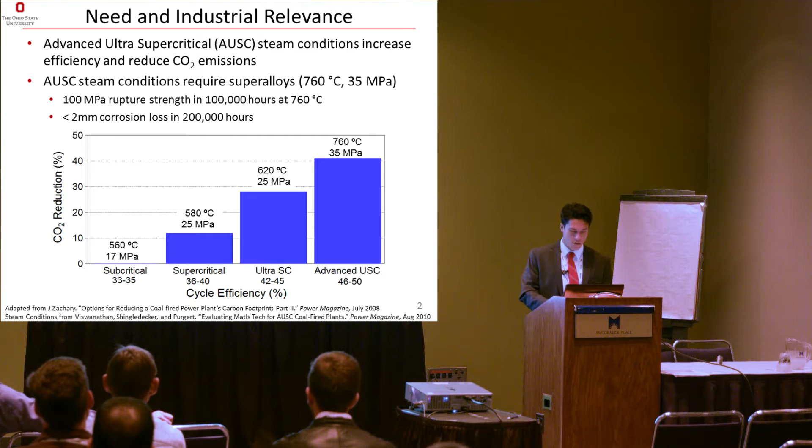Here are some of the requirements. The way we've gotten to AUSC is based on the steam conditions, so this is where steam is a subcritical fluid versus a supercritical fluid. I think you can get to ultra supercritical through plant design. But in order to jump to advanced ultra supercritical, we have some materials considerations, which is why we're studying superalloys for power generation.

Another way to illustrate that is perhaps one of my favorite graphs, which has to do with temperature for rupture in 100,000 hours. We have some common power plant materials here, and as you can see, based on the requirement of 760C and 100 MPa, you're really limited to these precipitation strengthened nickel-based alloys. Another one I'm going to talk about is alloy 617, which has been considered for use at 700C.

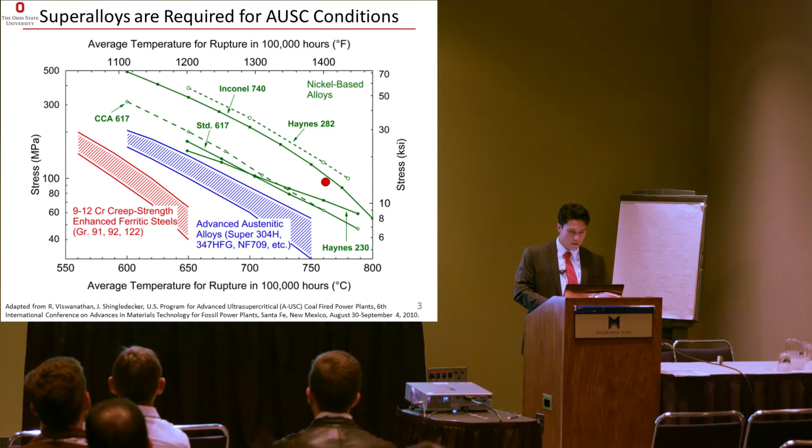So here are the nominal compositions of these alloys. This is 740H. It's been through a composition modification from 740 to H, and some of the changes there were balancing the aluminum and titanium ratio to work on the eta-phase precipitation problem. I think niobium and boron were reduced because there was some liquation cracking. Anyway, some key things to note here are the differences in molybdenum content and niobium and carbon and boron. Those are all going to be relevant to keep in mind.

I should point out, molybdenum is a solid solution strengthening element, which makes it more and more difficult to make forgings such as this. This is a 740H pierced and drawn billet. Here are the dimensions, this is made at Wyman Gordon, and I think a pipe of this size of such an alloy has only been made a couple times. 740H is favored because of this low molybdenum for the forging, and also coal ash corrosion resistance.

It was also designed for this application where alloy 282 wasn't really. It's just been found that it's pretty applicable.

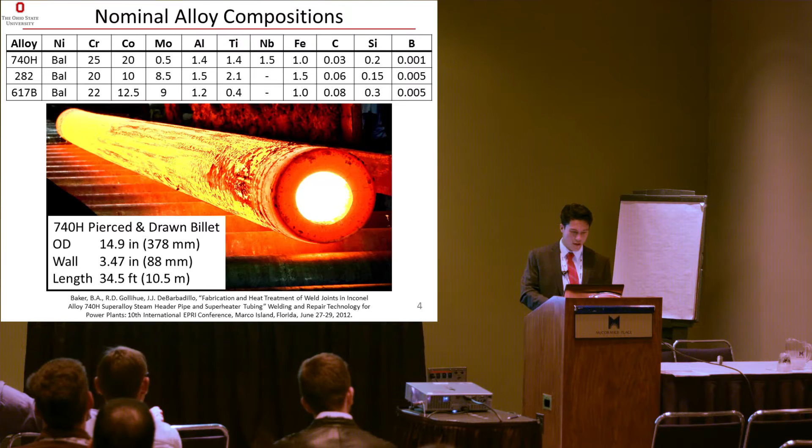So some of the motivation for this work has to do with the creep rupture strength and, of course, the weld metal weld strength reduction factor Dan mentioned. This slide helps really visualize those implications. Such a pipe of a stronger material like 740H could have a much larger ID with a much smaller pipe, and so this obviously moves way more steam. Of course, you would lose this advantage with the weld strength reduction factor, or with an alloy which is not as strong.

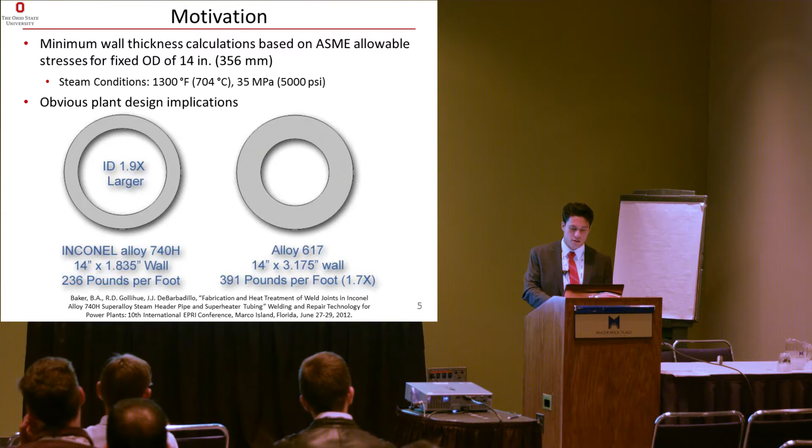The real motivation, though, is because we can account for a debit in weld strength with wall thickness. I mean, that's not an ideal solution, but it's a solution. The real motivation, though, would be premature cracking.

Premature cracking was actually found in a test plant made of 617 and operated at 700C, and there were cracks discovered via steam leaking all over some of these major weldments. That's pretty concerning because this is not as predictable as a weld strength reduction factor, which is a multiplicative factor of like 0.3 or 0.7, 30 percent, something like that.

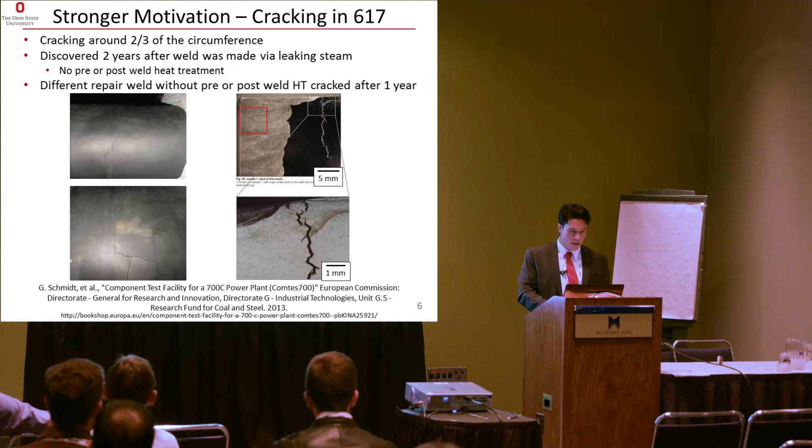So you can plan on that, but you can't plan on this, and that makes it, I think, a little bit more worrisome of a problem. The issue here is supposed to be stress relaxation cracking.

This occurs by concentration of stress at grain boundaries, often associated with intragranular precipitation. There's stress concentration at grain boundaries anyway, but if the grain interiors are strengthened by precipitation, such as in the case of these nickel-based alloys which form gamma prime, there's additional stress concentration at boundaries. When we're talking about stress concentration at boundaries, the other thing you can think about is boundary area in a given volume. So you can imagine if, like in this schematic here, these grains are all way bigger, the stresses on a boundary would be much higher.

Another point to make on the list here is that cracking was avoided in 617 with a post-weld heat treatment for stress relief, around 980 C for 3 hours. This has also been found to improve ductility in a slow strain rate test, which is targeted at this stress relaxation cracking problem. So here we have a little schematic of the problem.

We have, of course, a welding thermal cycle, and then it's followed by a homogenization and stress relief. This is the ideal case, but it's not too practical, certainly not desirable to do this. If this can be skipped at all, that would be ideal. But if you do skip this, and never heat above the aging temperature range, the stresses can't fully relax.

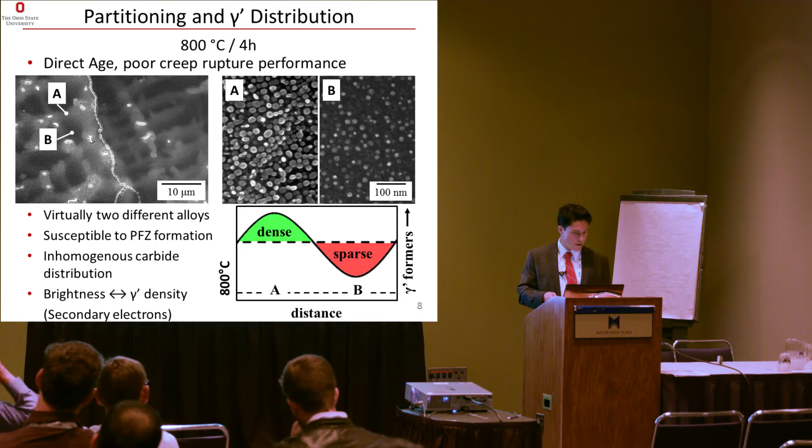So that's the direct age heat treatment, which we attribute most of the poor creep rupture properties to, the precipitate free zones I believe, but there's also this inhomogeneous gamma prime distribution.

If you do a higher temperature aging heat treatment, such as the one that successfully relieves stress in alloy 617, you run into a real problem where you're actually post-weld heat treating between the solvus temperatures for the boundaries and the cores. So when your post-weld heat treatment temperature exceeds the solvus temperature of the dendrite core, which has been reduced due to microsegregation during solidification, no gamma prime forms.

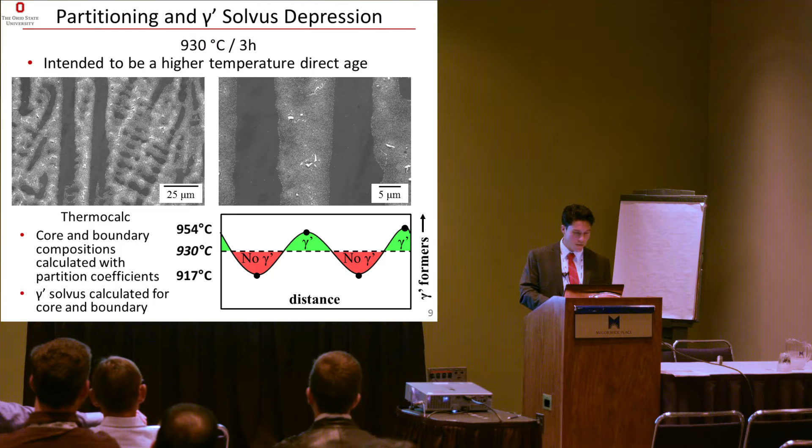And so this is probably like a worst case scenario for a post-weld heat treatment. You need to be below the gamma prime solvus in the core, and every other part of the microstructure, or above the solvus altogether.

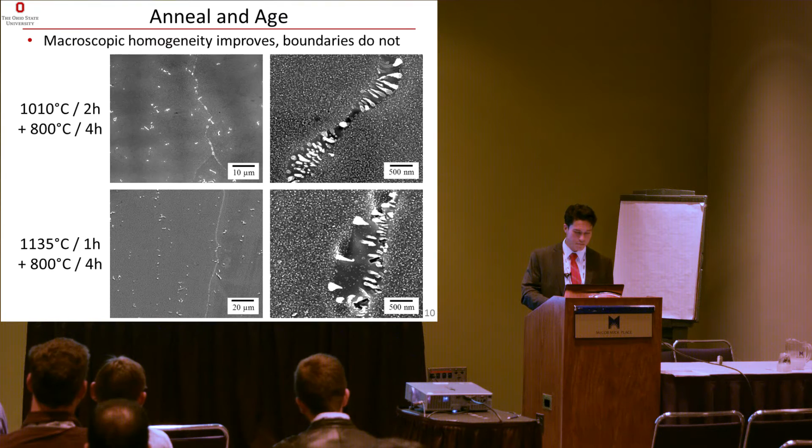So I think the best case scenario is 1100 C for 4 hours, followed by an aging, at which point you may or may not still form precipitate-free zones or discontinuous coarsening.

So at this time, I want to go back to the stress relaxation cracking problem. We've been over the post-weld heat treatments, and the best is probably homogenization at 1100°C for 4 hours, followed by aging.

However, I want to start talking about testing for this. As you look at this thermal cycle, you can think about the stresses that may go with it, and you can start to think about different Gleeble testing approaches.

As with any thermal cycle, you can do this in the Gleeble. You could simulate a heat-affected zone, or maybe not because your samples are taken from a weld, or maybe you simulate the homogenization and aging before applying load, or maybe you apply load when cooling.

A lot of people have thought about this before and haven't gotten to a point they found really satisfactory. I've tried different combinations of heating and loading at different times and rates, and I was never really satisfied.

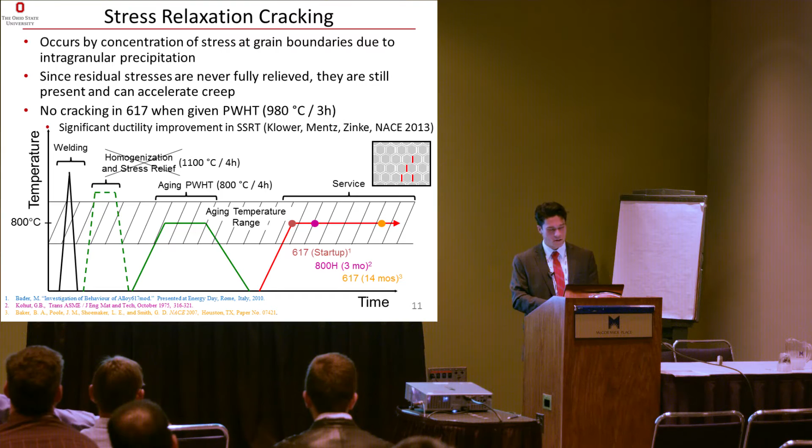What did occur to me is that when you're holding a hammer, every problem looks like a nail. So I decided I wasn't going to use the Gleeble for this - I didn't think it was really the appropriate approach. So I changed modes, into the standard self-restrained versus externally loaded testing debate. I changed approaches to self-restrained testing.

This testing approach begins with compact tension samples, which are pre-strained in compression to create a tensile residual stress, which then relaxes upon further heat treatment or thermal exposure.

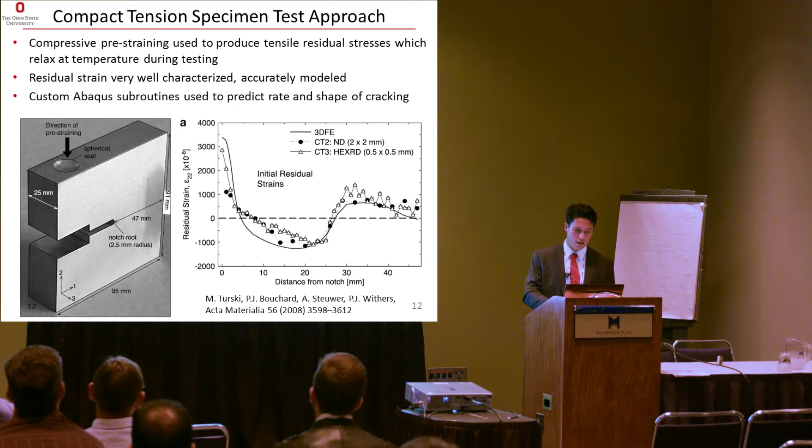In this particular work, Mark Turski and others out of the United Kingdom studied this quite thoroughly. They made an Abaqus model, measured the residual strain, figured out the residual stress, and via custom Abaqus subroutines were able to predict the rate and shape of cracking.

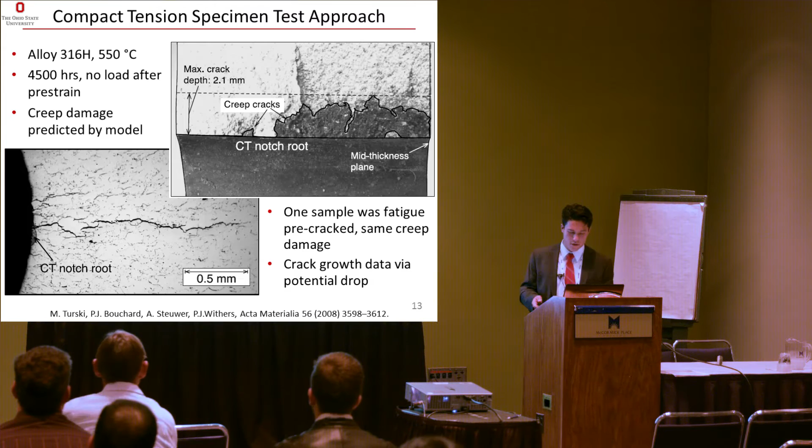Their results are here. I didn't show the cracking in the Abaqus model, but they have creep cracking of about 2 millimeters, and this took them 4,500 hours. One criticism of this is that they didn't generate very impressive cracking for such a long thermal exposure, and it would be nice to accelerate that.

We have just a couple notes here. They did fatigue pre-crack one sample; this one was not fatigue pre-cracked, and that didn't affect the amount of creep cracking which occurred later. Also, they were able to monitor crack growth via potential drop, and I tried to build my own potential drop system, but that wasn't real successful.

Anyway, my approach here is I wanted to do two things. I wanted to incorporate some sort of weld metal microstructure and subsequent post-weld heat treatments, and I also need to use thinner material - my samples are actually four-tenths of an inch thick.

The fabrication procedure was to make a weld on one side of my plates and then do different post-weld heat treatments, which we've already talked about regarding microstructural results. Then they're machined, pre-compressed and tested. So the procedure here is welding, post-weld heat treating, and then pre-compression.

In every case, I pre-compress them to 1 millimeter of plastic deformation, which I simply measure as the change in this gap - 1 millimeter smaller plastically. The thinking is that these are different alloys in different heat treatment conditions, but if you control the amount of plastic deformation, hopefully you have some sort of comparison between all these different conditions, even though the stresses will differ depending on the condition.

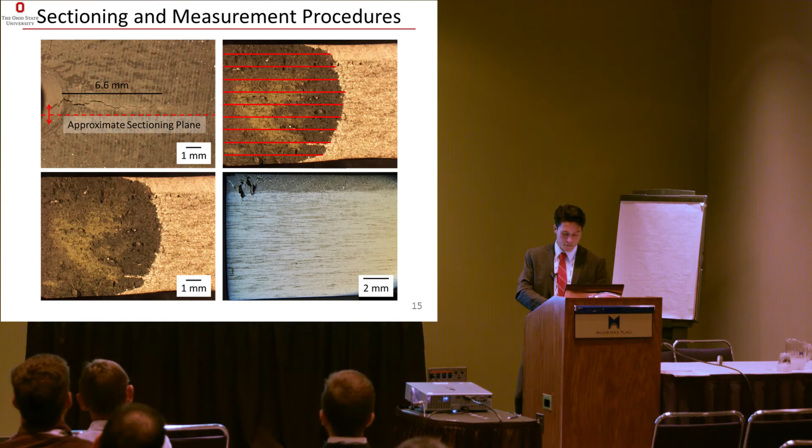Part of the thinking with making a weld on one side is to, first of all, avoid the age-old problem of putting a crack in the heat-affected zone in a compact tension sample.

In previous work, I had found some unbalancing of the crack front due to grain size variations, and there's a case on the next slide where you can see that pretty clearly.

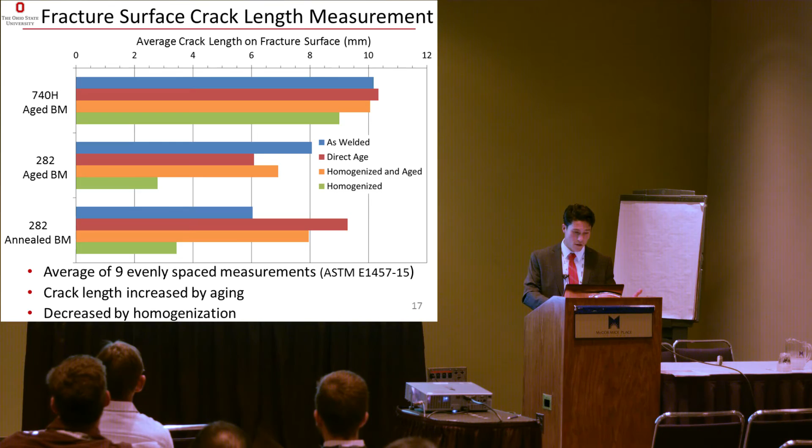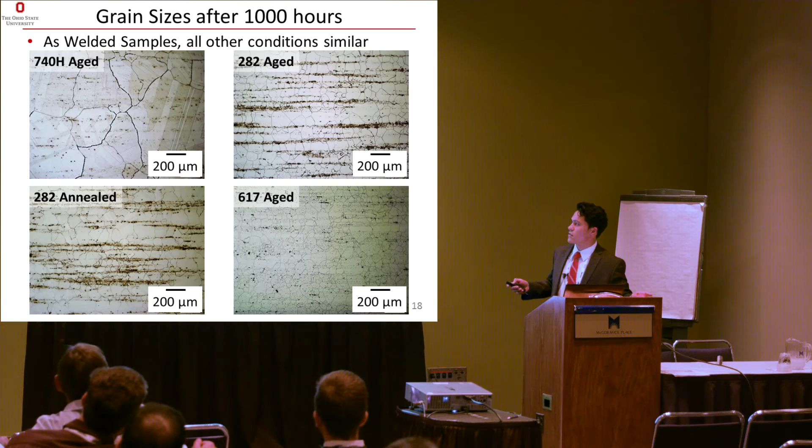Okay, so to quantify that, this is the results you find, and you can see in every case the 740 cracks way more. I think in general the post-weld heat treatments compared with each other have the expected trend of reducing the amount of creep cracking, either by improving the microstructural condition or relieving some residual stress created by the weld.

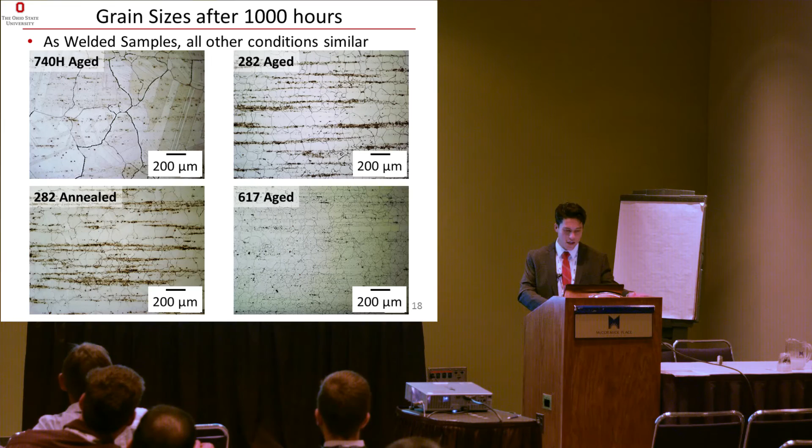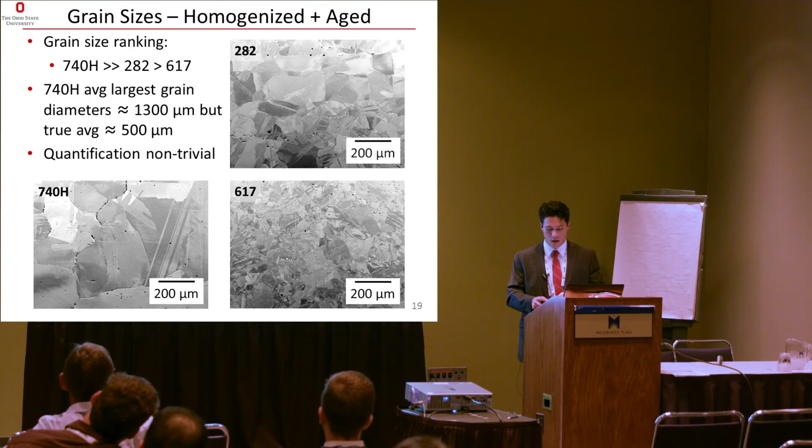So part of the reason for the really extreme cracking in alloy 740 is this almost anomalously large grain size. It's not anomalous for 740, but the grains are way bigger than 282 and 617. I guess the starting condition of 282 doesn't really affect the grain size. Since grain size normally shows up this way after welding, this is another way to look at grain sizes, using backscattered electrons, so you can see even more clearly how enormous the grains are in 740, which, as I explained before, would lead to higher stress concentrations per boundary.

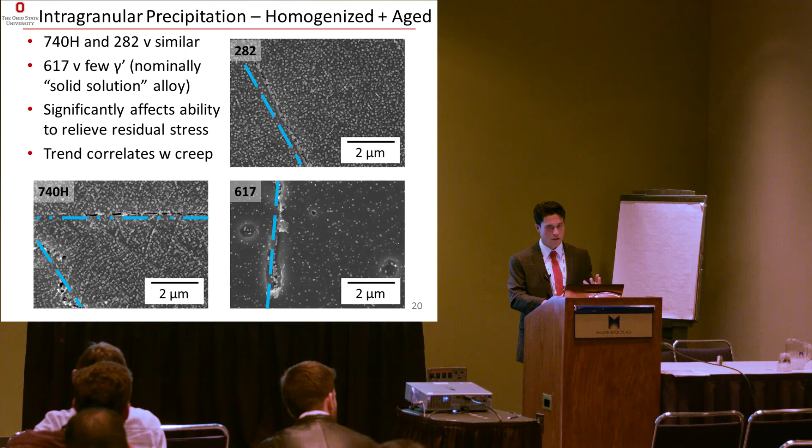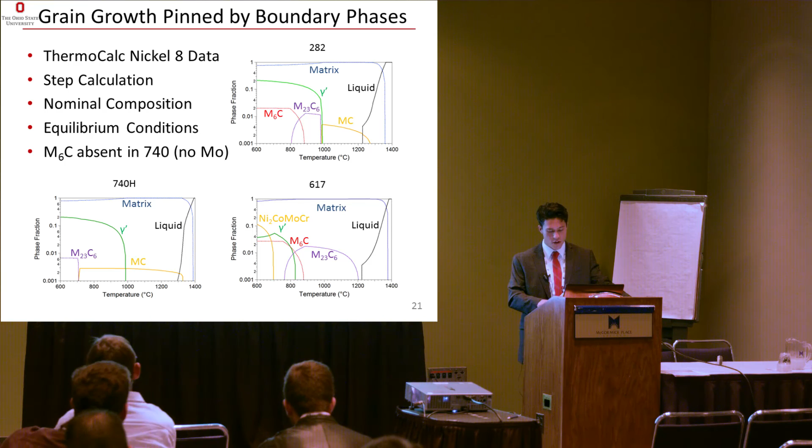The other problem with 740 is that there's going to be way more interior gamma prime precipitation, relative to the grains. If you were paying attention to the gamma prime former contents, you'll see that gamma prime precipitation is much more intense in 740 and 282 than 617. So between the small grain size and the weak precipitation reaction, I intuitively would expect 617 to be the most resistant to cracking.

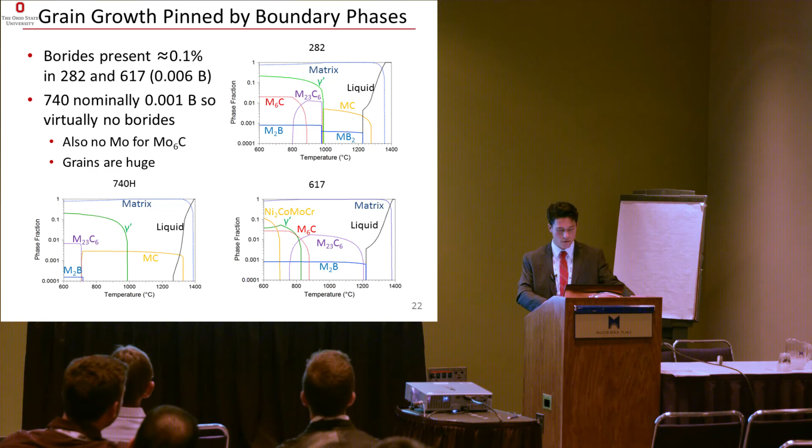Regarding the grain sizes themselves, some very simple thermodynamic calculations, just step calculations here, and then the same thing including borides, show that there's not a lot happening in 740 which could pin grain boundaries, and so it has these really huge grains.

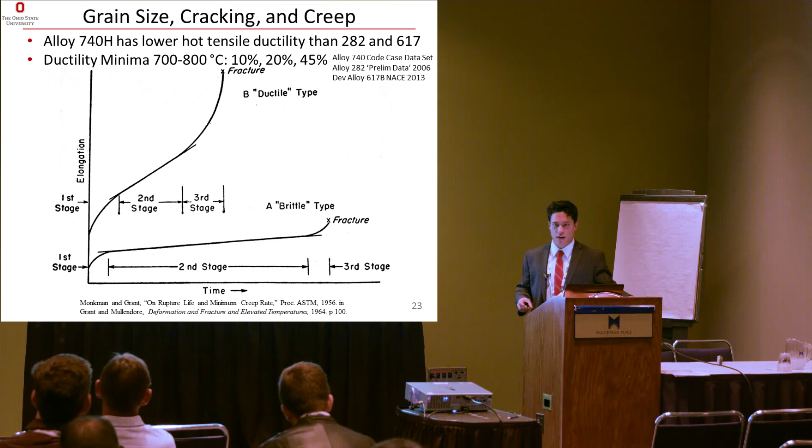There's a lot to talk about in a slide like this, but the reason I have it is because a couple things to mention are that what happens in the pre-compression is you essentially reduce the creep ductility. So if you have a very creep-resistant material like 282 or 740, which had much higher creep rupture performance, you've consumed some of their creep ductility in the pre-straining. If your material is much more ductile, you've consumed less creep ductility in the pre-straining, and it therefore has enough ductility to relieve residual stresses.

So we come to conclusions which pretty much just summarize what I said. This pre-compressed sample approach effectively generated cracking by stress relaxation because there was no other loading. Welding one side of the sample, though, I don't think was that good of an idea. Grain size appears to be king in this testing.

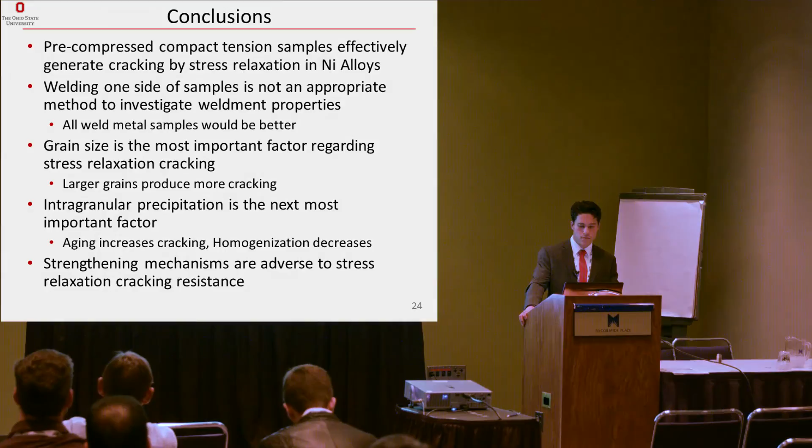Intragranular precipitation follows that. The big problem we're fighting here - this isn't a conclusion of this work, but an overall big picture perspective - is that the strengthening mechanisms put in place to improve the creep life are also making it more difficult to relieve residual stress, which is why I think we're probably going to see more of this relaxation cracking in the future.